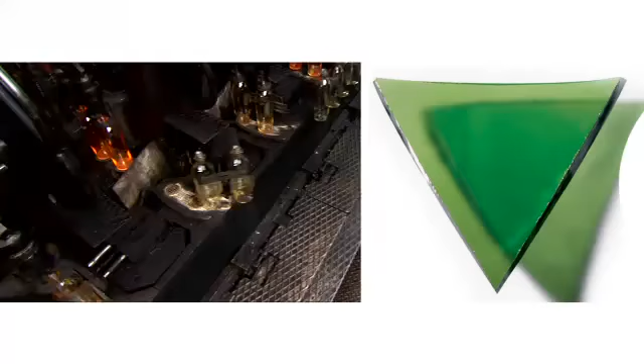In the heart of the Midi-Pyrénées in France, a unique tradition has been in existence for more than a century. The production of an ecological material, glass, the only 100% recyclable packaging. A plant with a remarkable history, the first pages of which were written more than a century ago by men who cherished the dream of freedom.

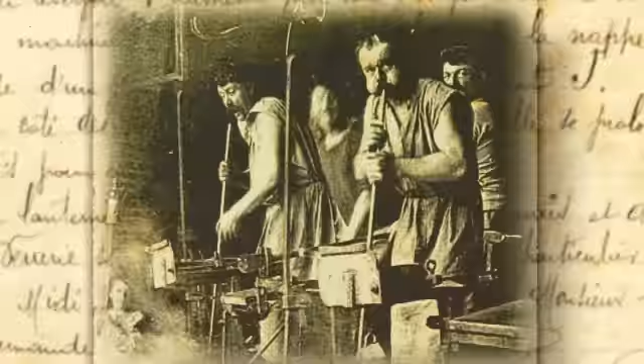In 1895, a factory in the Tarn hit the headlines. In Carmaux, the workforce at the glassworks stood up to the owner, Eugène Rességuier, who had sacked 2 union leaders. The strikers were supported by an up-and-coming member of the French Parliament, Jean Jaurès. The whole of France, right up to the National Assembly, held its breath.

Seeing that their employer was not going to back down, the glassworkers decided to set up their own plant. It saw the light of day in January 1896 with the help of donations sent from all over France.

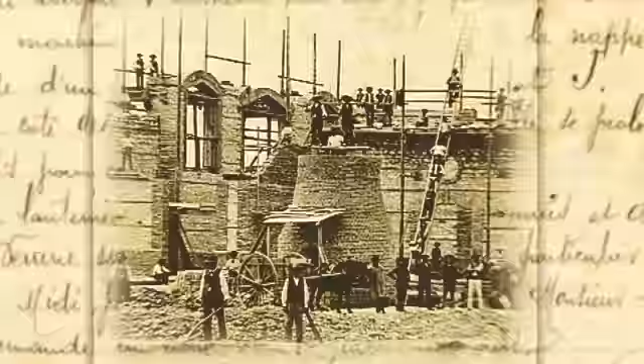A few months later, in front of a crowd of more than 8,000 people, Jean Jaurès inaugurated the Workers' Glass Factory in Albi, France's first workers' cooperative. In December, the first bottles were blown. The glass factory opened autonomously with its own equity.

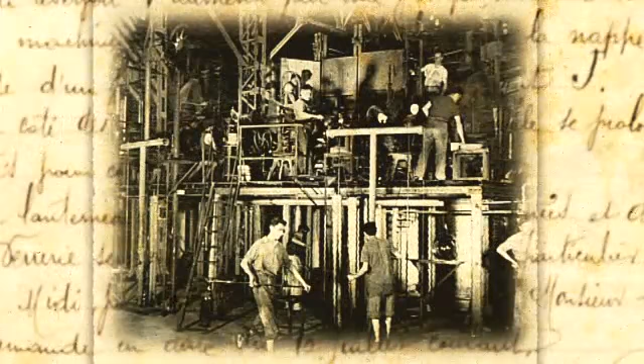It grew fast, but freedom has a price. The employees sometimes had to give up part of their salary when business wasn't so good. Despite that, the know-how and solidarity of the workforce kept the company afloat.

After the Second World War, VOA was started up again by Maurice Thorez, Vice President of the Council of Ministers. With a burst of popular enthusiasm reminiscent of the fervour of the company's beginnings, the factory was back on the rails again, loyal to its values. The company's motto is work, capital, talent.

Nowadays, as you know, glass is no longer considered as a receptacle, but as a packaging. Glass has a highly promising future. In 1975, the plant was built on its present site. VOA was the 4th largest producer of bottles in France. In 1998, it became a full subsidiary of Saint-Gobain. Modern and efficient, it produces 1 million bottles every day.

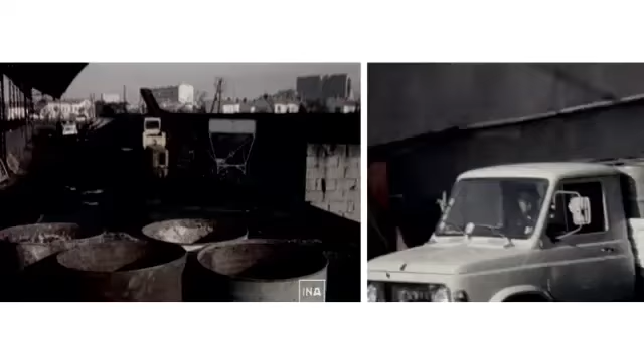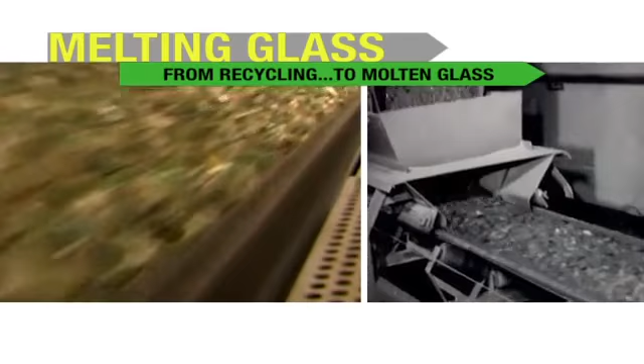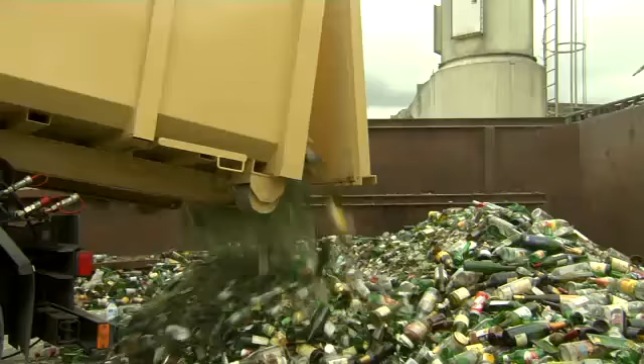A daily routine that preserves natural resources for future generations. 10,000 bottle banks are distributed all over the Midi-Pyrénées. Nearly all the region's waste glass is collected. Every year, tens of thousands of tons of bottles and jars are collected and transported to the Albi sorting centre, where they're crushed, sorted, separated from their impurities and then transformed into a new material, cullet.

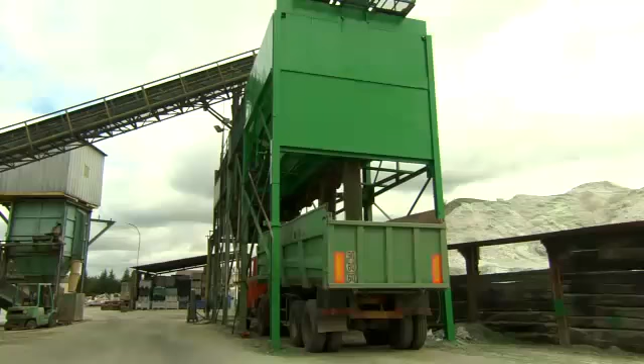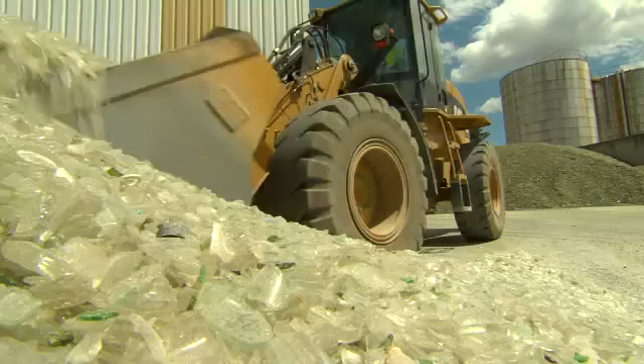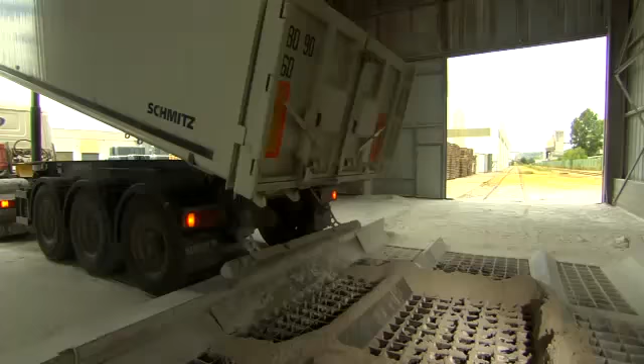VOA was the glassworks chosen to develop it. Since 1980, it's been recycling the glass collected throughout the region. Cullet is the main raw material. It's mixed with other constituents of glass, mainly sand, calcium and sodium carbonate. So glass is a 100% ecological material, a mixture of recycled glass and abundant natural raw materials.

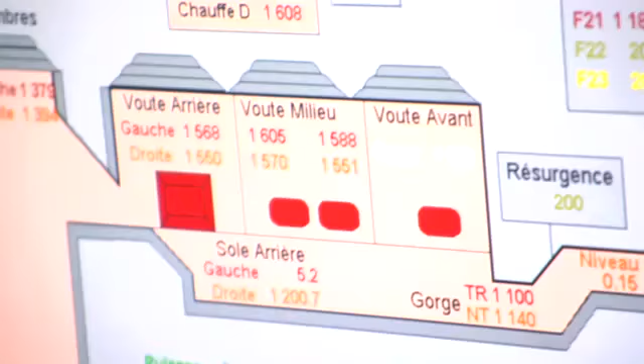This mixture is melted in huge furnaces which operate 24 hours a day, 7 days a week at a temperature of around 1500 degrees Celsius. The melting cycle is regulated from A to Z by the control room, the nerve center of the plant. From putting in the raw materials to taking out the molten glass takes about 24 hours.

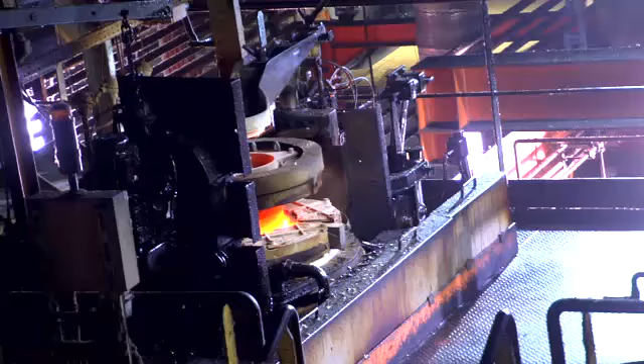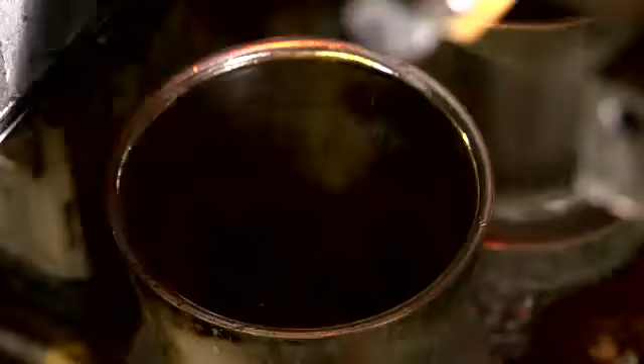At the furnace outlet, a feeder conditions the glass to the required temperature and conveys it to the machines. At the end of the feeder, a strand of molten glass is severed into drops called gobs. With perfect synchronization, a network of guide rails distributes these glass gobs to the various molds to form the bottles.

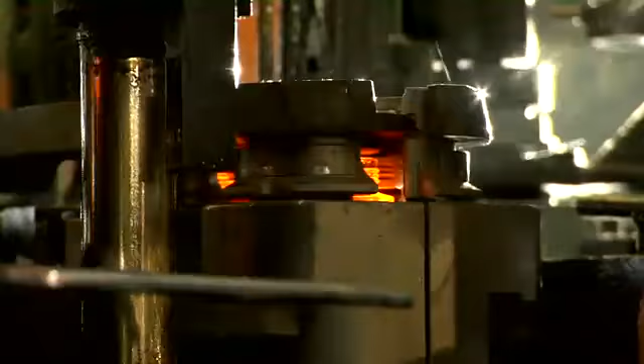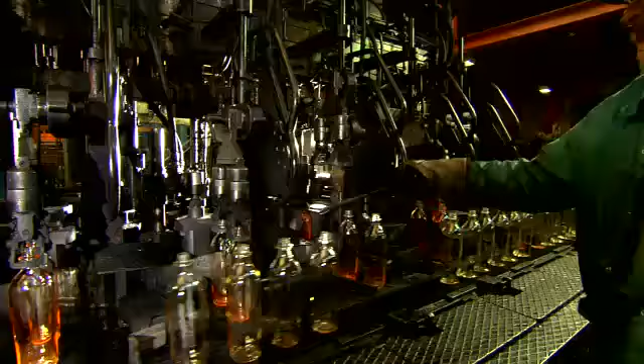A first mold in cast iron, the pre-forming mold, gives the bottle a provisional shape, the pre-form. Then the preform is transferred by an arm into the finishing mould, in which the bottle is blown into its final shape. To obtain a perfect bottle with no defects, the machines are continuously maintained and the moulds are regularly inspected.

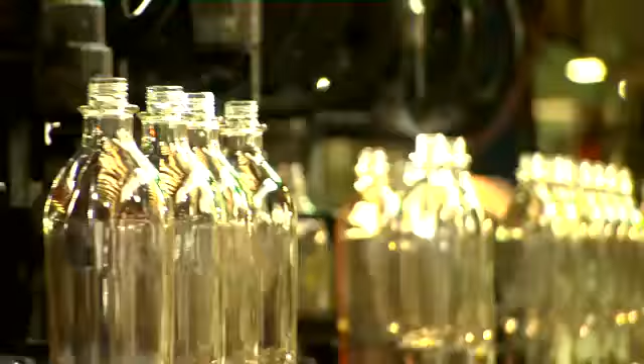The bottle, which is still at a temperature of over 500 degrees Celsius, is then extracted from the finishing mould with tongs and put on a cooling tray before being conveyed. The whole forming cycle only lasts a few seconds. At this stage, the bottles have acquired their final shape.

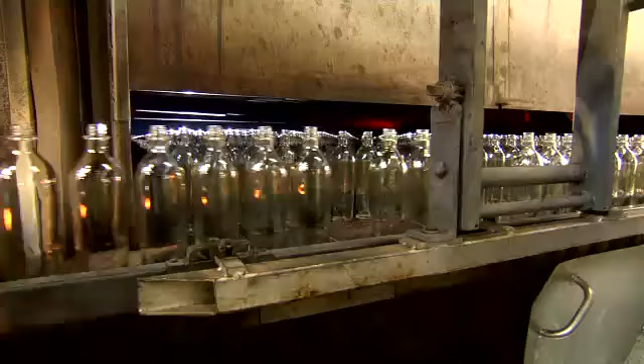To guarantee their strength, they must be reheated and then gradually cooled in a tunnel furnace known as a reheating furnace. Scratch-resistant surface treatment is applied hot before they go into the reheating furnace and cold as soon as they come out. The bottles are now ready for a series of inspections.

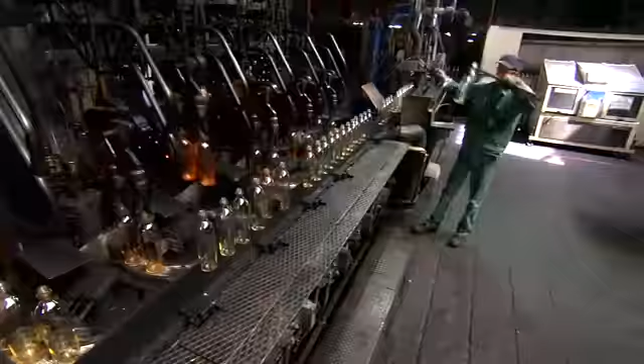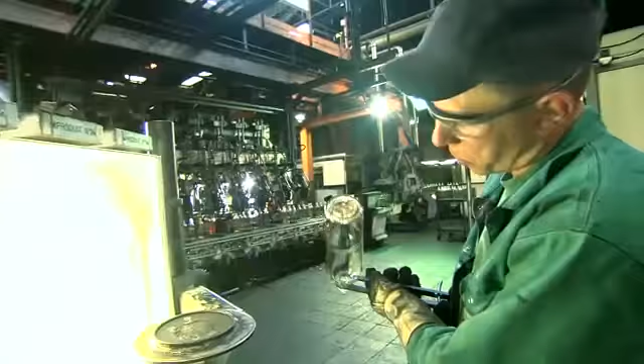To ensure the high quality of products, VOA conducts a chain of inspections throughout the production process. Manual control of sealing as soon as the bottles are formed. Visual inspection to eliminate flaws. Automatic inspections using high-tech instruments, video or light beams.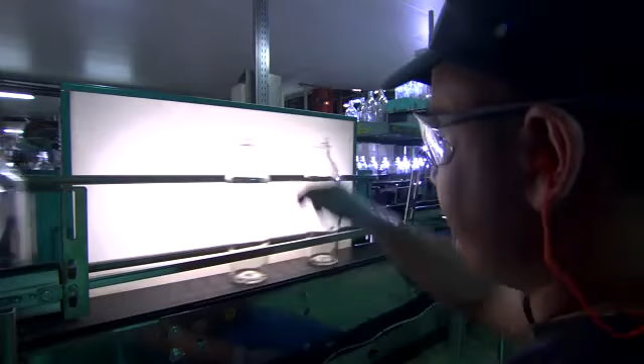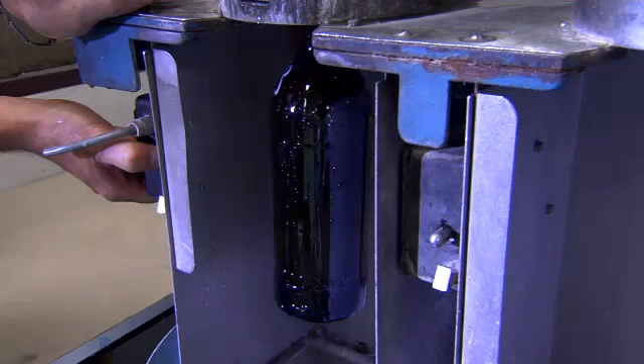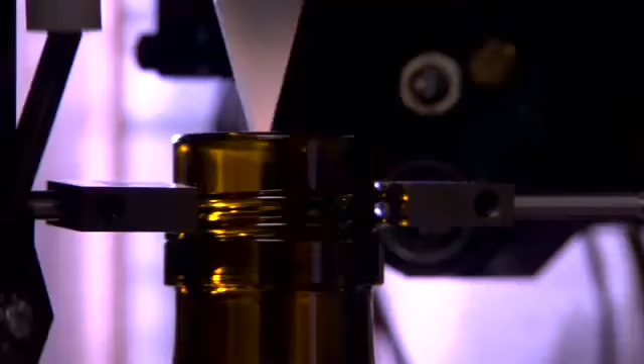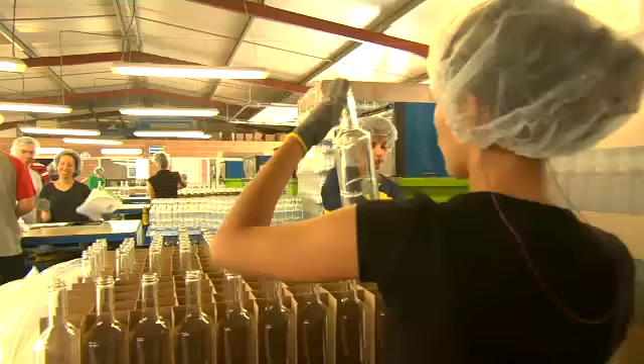In-depth laboratory tests are also performed for strength, detection of possible defects in the glass and to check thickness and dimensions. This extensive inspection process guarantees safety of use both for the bottler and for the consumer. The inspection staff are required to respect strict hygiene rules. All the bottles considered unsatisfactory are automatically rejected and then remelted in the furnace. The others are conveyed to the packing machine.

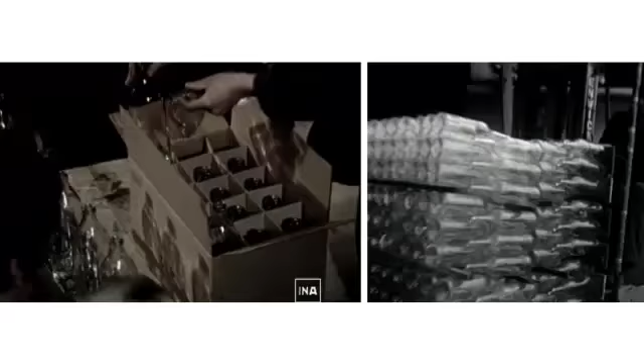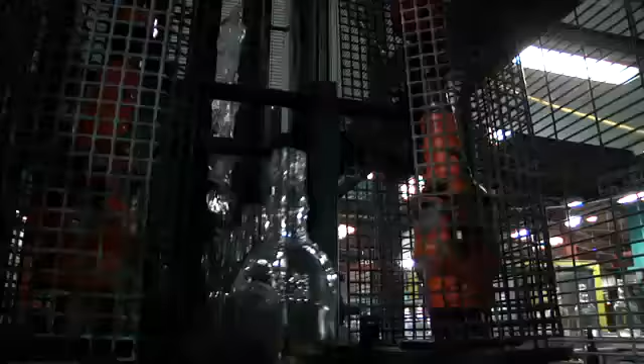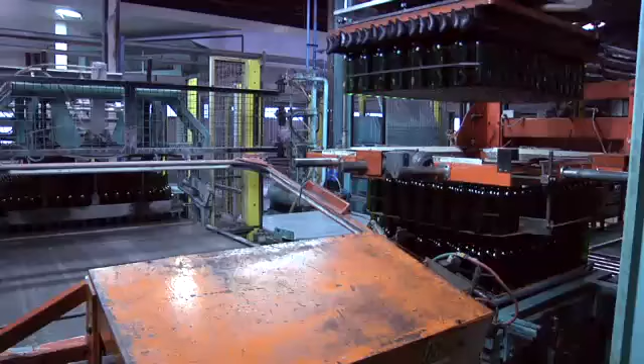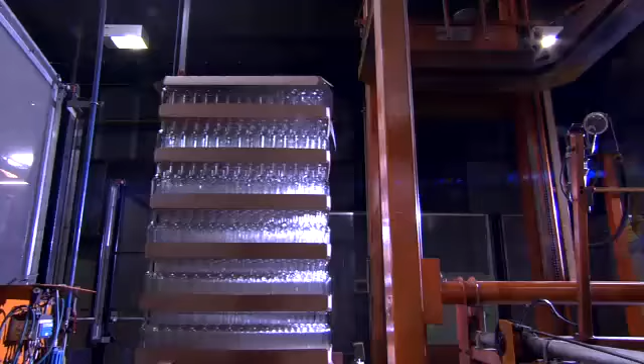The bottles are conveyed to the automatic packer, which makes up a pallet, adapting the size and packaging of the pallet to the requirements of each of VOA's customers. On average, each pallet contains 1,000 bottles. The automatic conveyor takes the pallets to the wrapping phase. The wrapper is heat shrunk onto the pallet in the retraction oven. The bottles are now protected from humidity and dust.

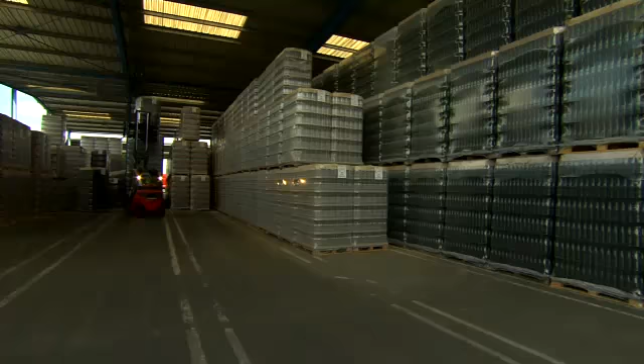Transferred to the plant's storage area or to regional warehouses, the pallets are now ready to be delivered. Destination: 1,000 customers in France and 20 or so other countries. Agri-food groups, merchants or wine cooperatives. VOA internal services are available to each customer. They can organize deliveries in less than 48 hours, launch very short production runs on a dedicated flex line, or provide exclusive offers like the Selective Line brand of very high-end wine and spirits bottles for export.

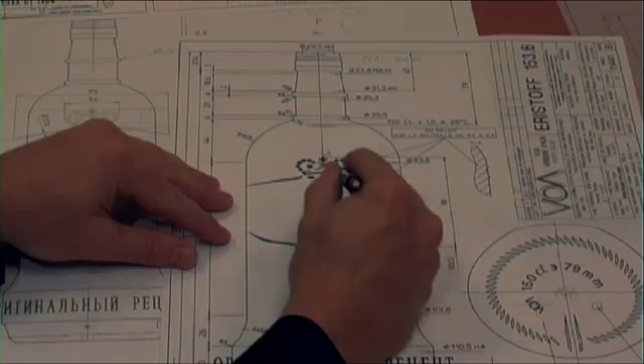For all these customers, VOA's Integrated Product Engineering Department constantly designs and develops new products. At the cutting edge of innovation, VOA has made continuous improvement a company value. It's the first glass company in Europe to win quadruple certification in the fields of quality, food safety, workplace health and safety, and the environment.

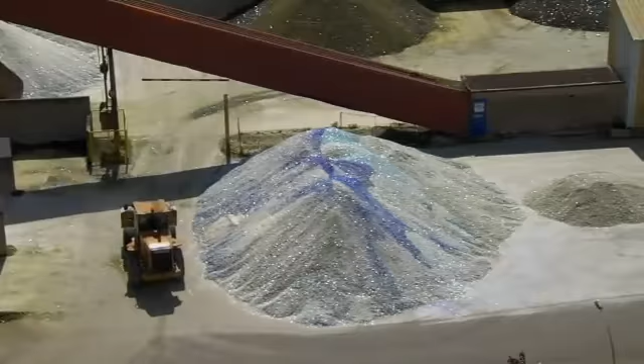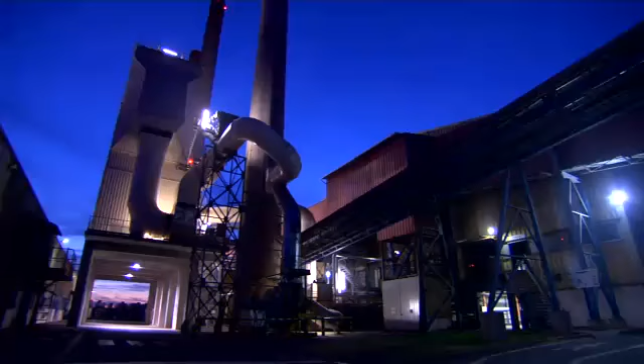VOA is committed to reducing its own ecological footprint by limiting its water consumption and processing sulfur oxides and dust. VOA has reduced its carbon emissions by 20%. For more than a century, the VOA Glass Works in Albi has remained faithful to the ambitions of its founders, continuously adapting to the demands of the times.